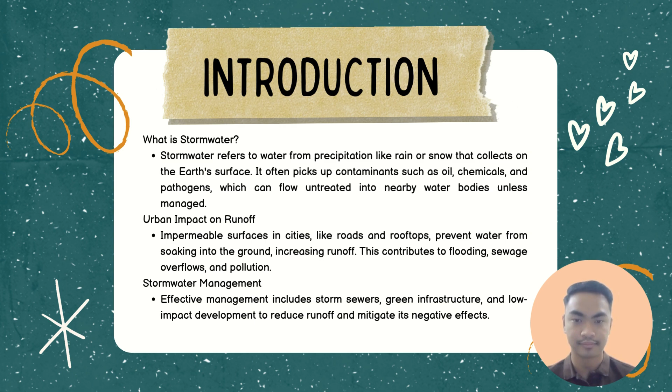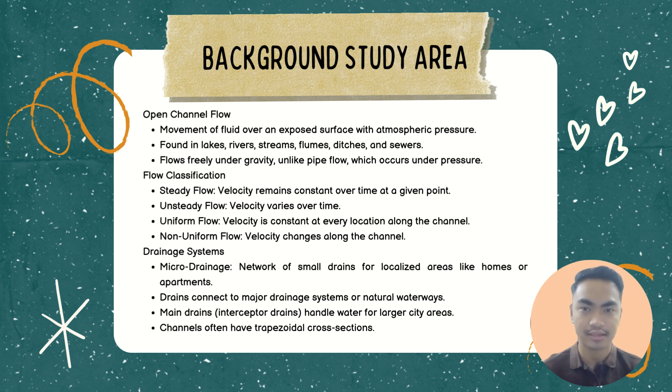The last point is about drainage system. Micro drainage, network of small drains for localized areas like homes or apartments. Drains connect to major drainage system or natural waterway. Main drains, interceptor drains, handle water for large city areas, and the last one is channels often have trapezoidal cross-sections.

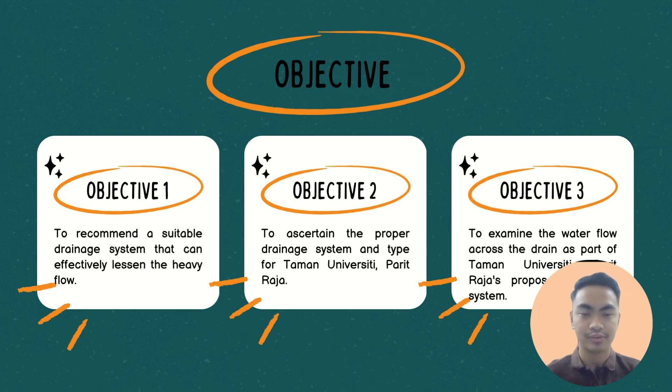Okay, next we go through the objectives of this project. The first one is to recommend a suitable drainage system that can effectively lessen the heavy flow. Second, to ascertain the proper drainage system and type for Taman Universiti Parit Raja. And the last one is to examine the water flow across the drain as part of Taman Universiti Parit Raja proposed drainage system.

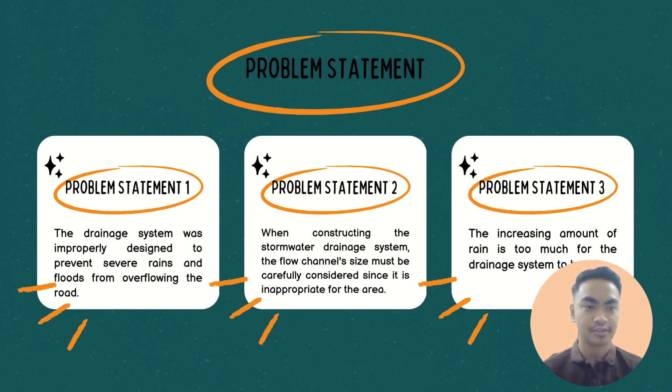Okay, the last one is about problem statement. The first problem statement, the drainage system was improperly designed to prevent severe rains and floods from overflowing the road. Second, when constructing the stormwater drainage system, the flow channel size must be carefully considered since it is inappropriate for that area. And the last one is the increasing amount of rain is too much for the drainage system to handle.

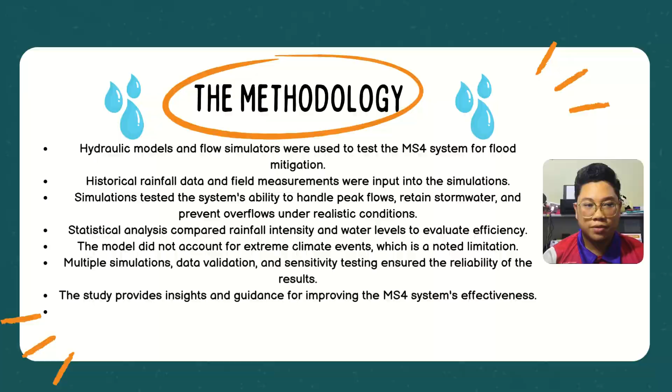So, I will go through to the first question. State the name of the stormwater drainage design manual required by the authority for drainage design in Malaysia. The Urban Stormwater Management Manual for Malaysia, or MSMA, is the official standard that must be followed when designing stormwater drainage in Malaysia. MSMA also provides specific requirements for drainage system sizing and architecture, as well as advice for calculating stormwater runoff and determining acceptable pipe sizes.

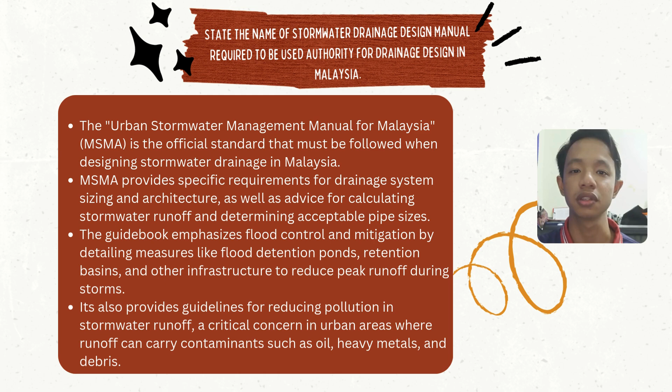The guidebook emphasizes flood control and mitigation by detailing measures like flood detention ponds, retention basins, and other infrastructure to reduce peak runoff during storms. It also provides guidelines for reducing pollution in stormwater runoff, a critical concern in urban areas where runoff can carry contaminants such as oil, heavy metals, and debris.

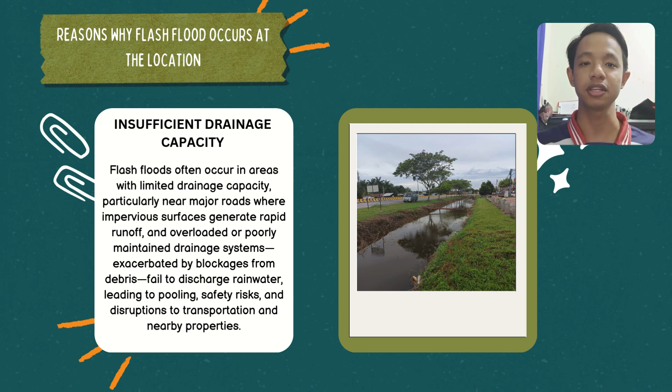The next question is why flash floods occur at the location. The first reason is insufficient drainage capacity. Flash floods often occur in areas with limited drainage capacity, particularly near major roads where impervious surfaces generate rapid runoff, and overloaded or poorly maintained drainage systems, exacerbated by blockages from debris, fail to discharge rainwater, leading to pooling, safety risks, and disruption to transportation and nearby properties.

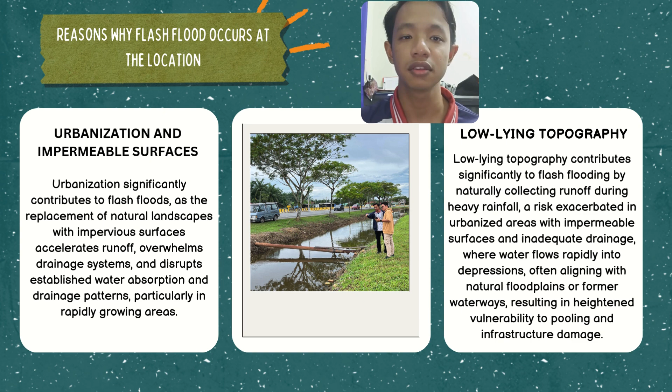The next one is low-lying topography. Low-lying topography contributes significantly to flash flooding by naturally collecting runoff during heavy rainfall, a risk exacerbated in urbanized areas with impermeable surfaces and inadequate drainage, where water flows rapidly into depressions, often aligning with natural floodplains or former waterways, resulting in heightened vulnerability to pooling and infrastructure damage.

Hello, my name is Zaki Irfan, and now I will be explaining Chapter 3, which is our proposed flood mitigation method. We chose the Municipal Separate Storm Sewer System, MS4 for short.

So, based on our research, we have found three methods to mitigate the flood. The first method was to create an on-site storage where we can collect and save rainwater, which will be supplied to other areas. The second method is to improve the drainage system by increasing the width and adding more height.

And the last method is the Municipal Separate Storm Sewer System, MS4, which I will describe as a system where we collect rainwater and separate it into two types: sanitary sewer and storm drain. The water which has fewer chemicals and is not harmful will be brought to natural waterways such as the river or the ocean, whereas water that contains harmful bacteria will be carried to the treatment plant.

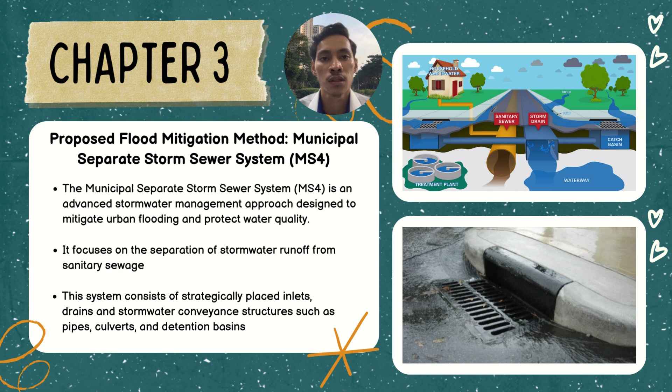Based on our understanding, we think the Municipal Separate Storm Sewer System, MS4, is the best method to control flood in the area. This method focuses on the separation of stormwater runoff from sanitary sewage, and it consists of different types of structures such as pipes, culverts, and detention basins. We also have inlets to collect the rainwater, and the inlets reduce the amount of leaves inside the storm drain.

Now I will explain how the MS4 works. The first step is collecting stormwater: during rain, stormwater is collected from surfaces such as roads, rooftops and parking lots, entering the MS4 network through grated inlets. After that is stormwater transportation. The stormwater flows in underground pipes and open channels that guide it into designated outfalls or treatment facilities.

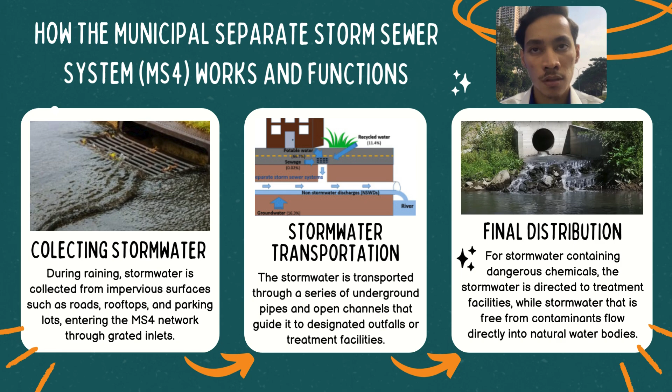Last but not least is the final distribution. Stormwater containing dangerous chemicals is directed to treatment facilities. Meanwhile, rainwater that is free from harmful bacteria flows directly into natural bodies such as the river or the ocean.

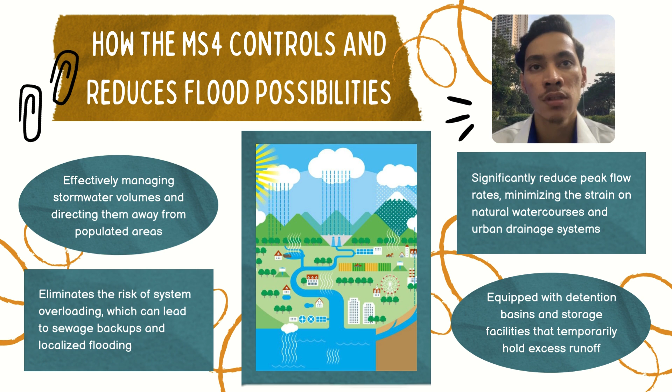Now I will explain how the MS4 controls and reduces flood possibilities. It is effective at managing stormwater volumes and directing them away from populated areas. It eliminates the risk of system overloading, which can lead to sewage backups and localized flooding. It also significantly reduces peak flow rates, minimizing the strain on natural watercourses and urban drainage systems. And the MS4 is equipped with detention basins and storage facilities that temporarily hold excess runoff. So overall, the MS4 is very good at controlling and reducing flood possibilities.

Next, I will describe the positive outcomes of the MS4 system. Firstly, it prevents flooding, because the MS4 effectively channels stormwater away from urban areas by managing large volumes of rainwater even during intense tropical storms. So even when it's raining heavily, the water will flow underground and be distributed to specific locations.

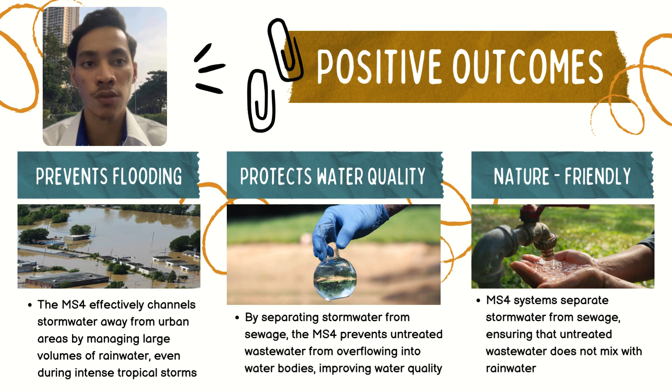Next, it protects water quality. By separating stormwater from sewage, the MS4 prevents untreated wastewater from overflowing into water bodies, improving overall water quality. Last but not least, the MS4 system is nature friendly. It separates stormwater from sewage, ensuring that untreated wastewater does not mix with rainwater.

Lastly, the conclusion for this project. This project demonstrates that the MS4 system is an effective solution for managing urban flooding. Through simulation and analysis, the system was shown to reduce peak water flow, retain stormwater, and prevent overflows during typical rainfall events. Its cost effectiveness and adaptability make it a practical choice for urban stormwater management.

However, the study identified limitations such as the model's inability to predict performance under extreme weather conditions or climate change impact. This highlights the need for future research and system improvement to enhance resilience. By ensuring reliability through data validation and sensitivity testing, the study provides valuable insight into the MS4 system's strengths and areas for enhancement. Overall, the project confirms the importance of integrating the MS4 system into urban infrastructure to mitigate flooding and improve resilience against future challenges.